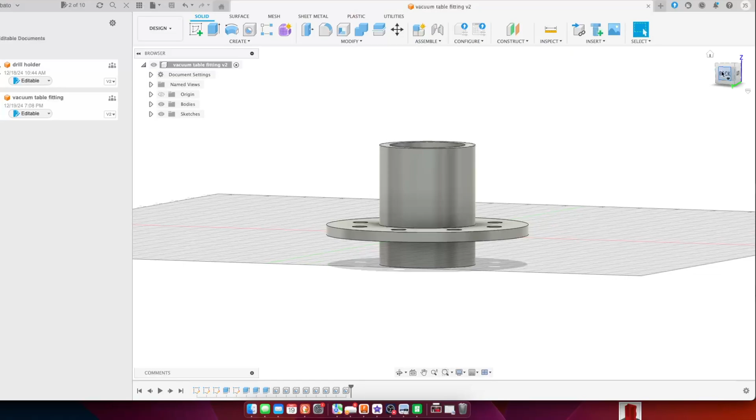Welcome to Outlaw Woodworking. Today we are going to design this little part for my vacuum table, and it basically goes upside down like that. And we need 8 of these.

We're going to turn our CNC table into a vacuum table. Right now it's a T-track, but I want to turn it into a vacuum.

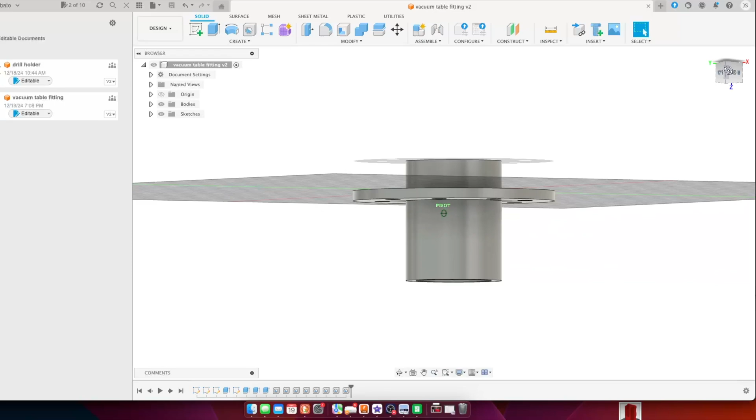So I need 8 of these parts. Let's get started. We'll draw this part and then we'll print it on our 3D printer and see how it turns out.

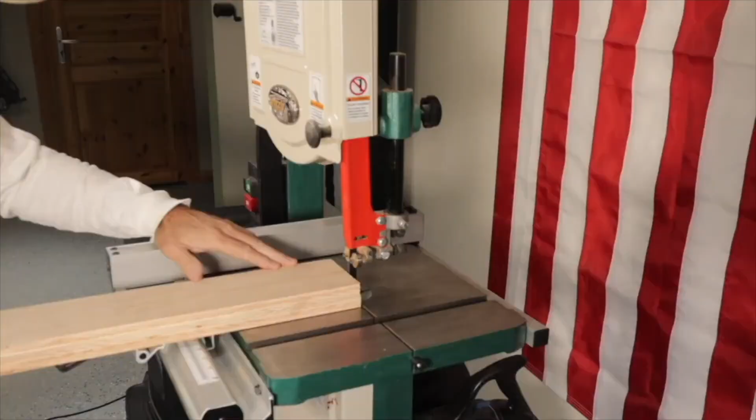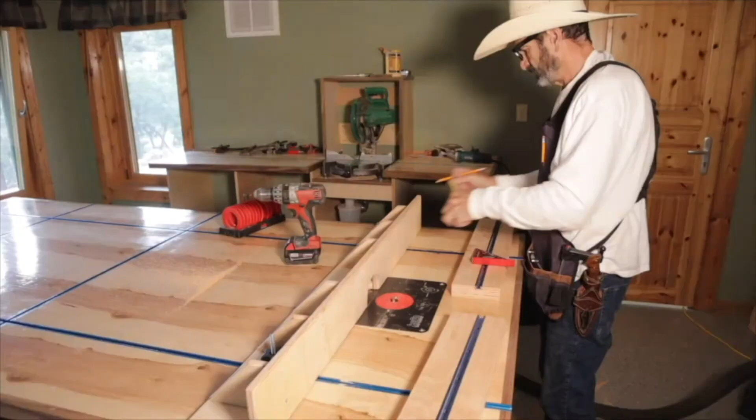There he goes, it's a working man. He's trying to make a living any way he can. And he'll break his back for $1 or $2. Oh, there ain't no shame in what he do.

Oh, work it out. So here we are in the new drawing, Fusion 360.

We're going to go ahead and get us to the top of this. This is where we're going to start drawing right here. We'll go over here to draw, create. Now the first thing we're going to create is the outside flange.

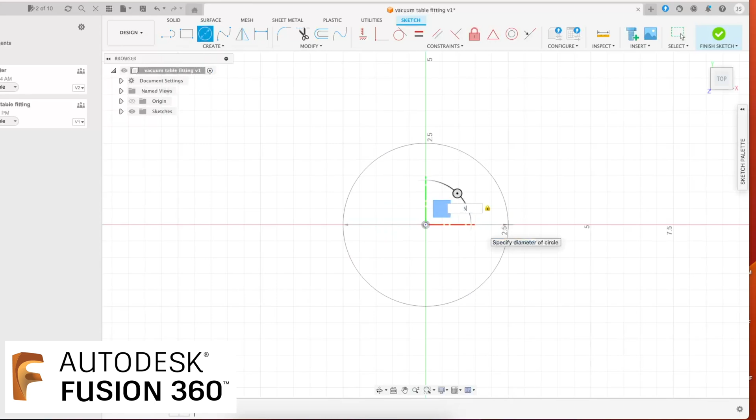So I'm going to go ahead and create a circle. And I believe that I'm going to make the flange 5 inches. So we'll go ahead and hit 5, hit enter, and there's our first flange.

Now I want the pipe to be able to travel. The pipe's going to go through this flange. So let's go ahead and create that circle next, starting with the outside diameter, which on a 2-inch pipe, the fitting diameter... let's see, is that right? The pipe diameter is 2.37. Let's check that real quick.

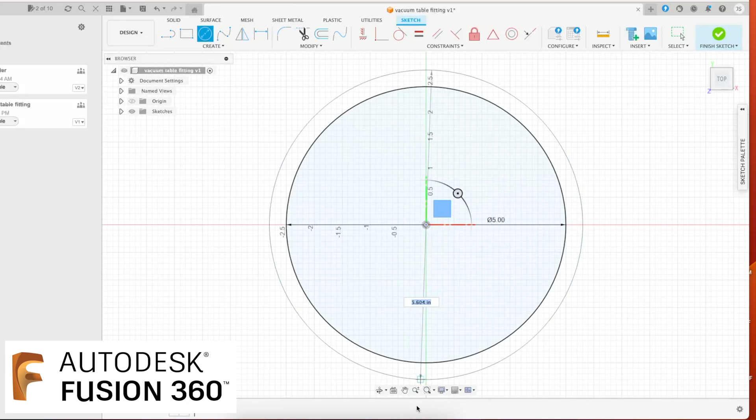I believe I have a file right here. Let's see. So right here, 2-inch pipe, outside diameter is 2.375. 2.375, okay.

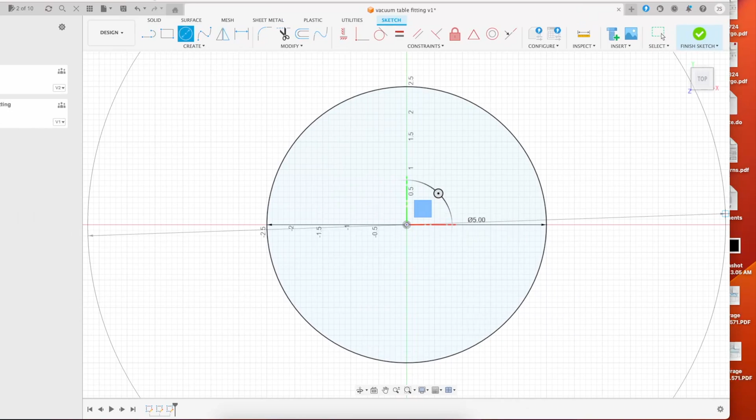So we'll go with that. We're going to go 2.375 and hit enter. Okay, so there's our outside diameter of the pipe.

Now we're going to put an inside diameter of 1/4 inch, 0.25. So we're going to subtract, we'll go ahead and just highlight that. We'll go up here to create offset, in the modify section right here, offset to the inside. So we should be able to go negative 0.25, and that creates that circle.

Okay, so now we got all our circles there. The next part of this puzzle, let's see, highlight. Okay, so it's got these highlighted just where we want.

The next part of the puzzle is actually the part I always struggle with, is all the little holes for the flange. So we're going to create a hole here. We're going to do 1/4 inch holes.

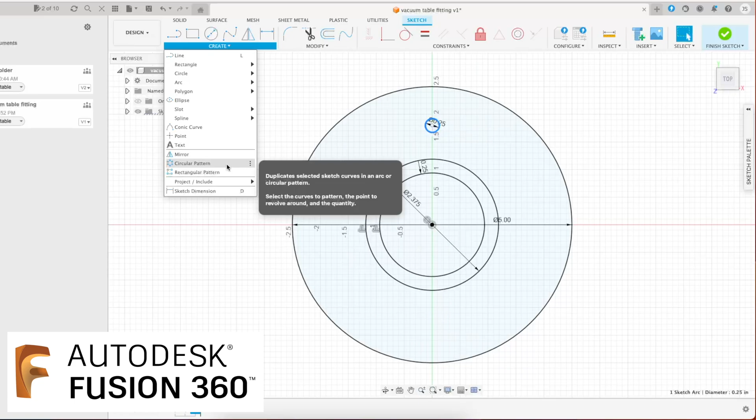0.25, hit enter, and now we're going to select this and we're going to try to do a circular pattern. Now we already got the one object. We go ahead and select the center point, and then we select how many screws we want, 8, and that should give us all our screw holes.

Okay, we're getting closer now. So what I want to do first is go for this one right here and put the thickness of this plate. I tend to go up here to solids, extrude, and I tend to be a 1/4 inch, seems to be pretty stout.

So we'll go ahead and create new body and hit OK. Now if you turn this, you'll see it's thicker. Got some nice sized screw holes there.

Okay, next up, we want to - where's our other ring at? We lost something here. Let's go back. So that should have just been that.

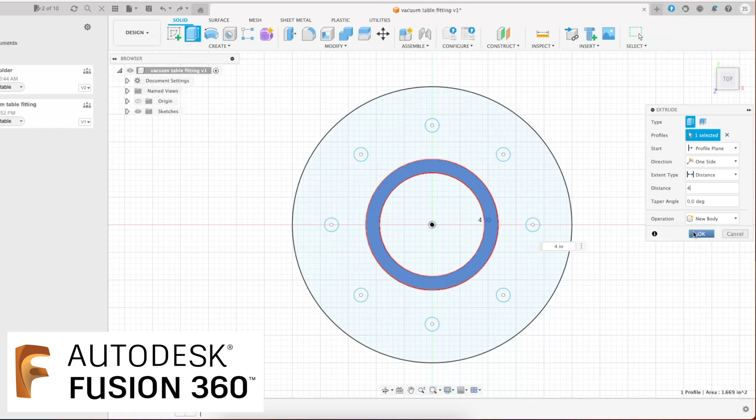Let's go ahead and extrude this one first and see what happens here. We're going to go 4 inches. Well, let's see, 3/4 inch. Yeah, let's go 4 inches and hit OK. Why am I losing this other thing?

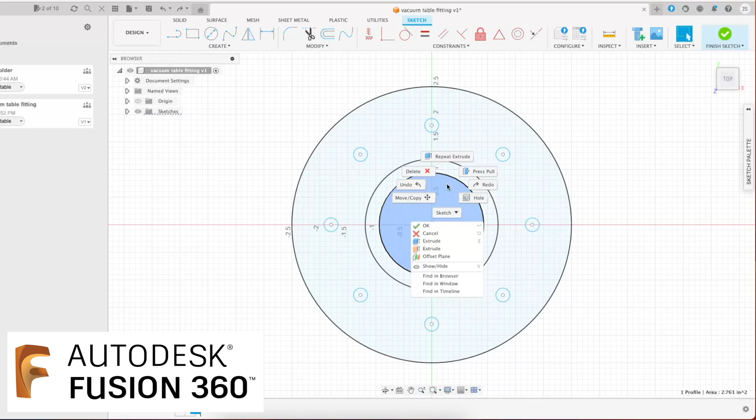It can be complicated sometimes. Okay, we might end up having to do this in separate pieces.

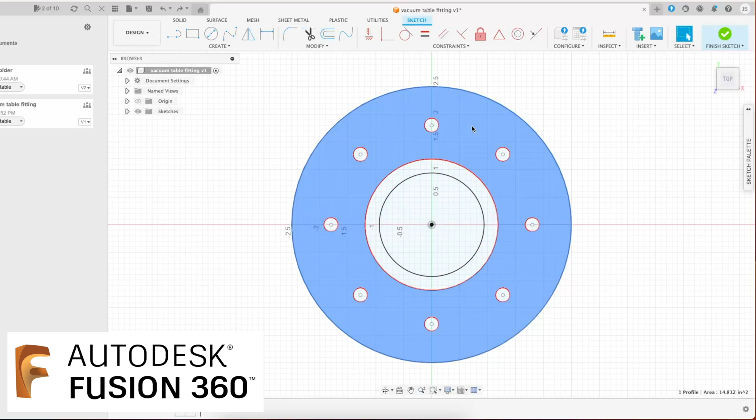All right, let's extrude this one first, 0.25. Profile plane, one-sided. We're just going to go one side, hit OK.

Now I don't know why we lose our pipe in the middle, but that's okay. Okay, let's go ahead, we'll draw another circle in here. I don't know why we got to do that, but that's just the way it is. We're going to draw another circle, and this one's going to be - oh, wait a minute, no. We need to offset this one inside.

Oh, I see, we lost that outer circle when we extruded this. So we'll go ahead and put a new circle.

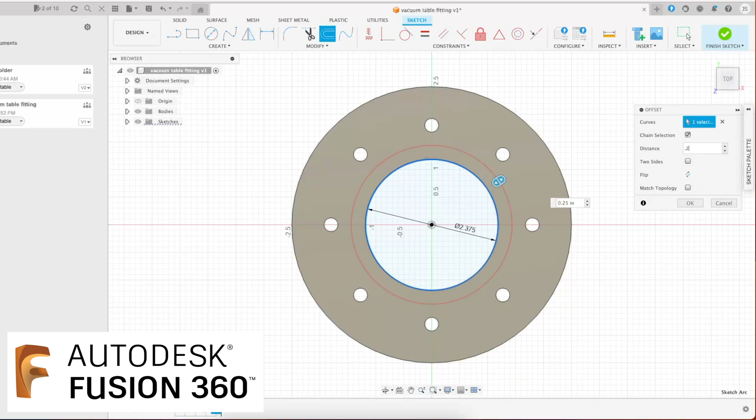This one's going to be 2.375, that's the shape of our part. And now we'll go ahead and offset that one. We'll select the curve. There we go. Now we can put 0.25, and we got to go negative to go to the inside, negative 0.25, and there we go.

Okay, now we're looking a little better. Now what we want to do is extrude this both ways. So let's see if that'll work. A lot of times you just got to try different things.

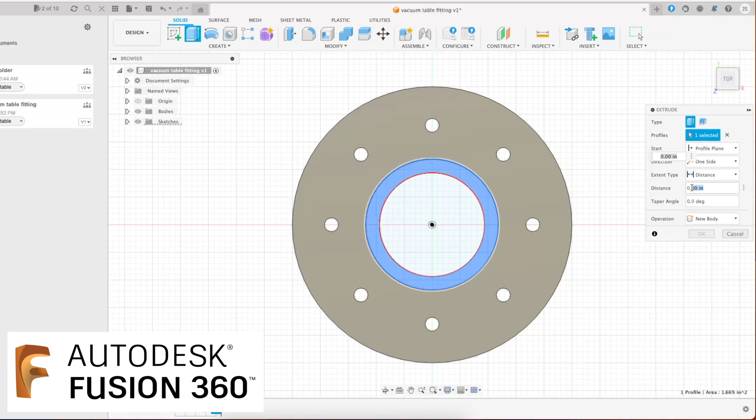I've got it selected, I know that I want to go 1 inch the other way, so let's go negative 1 inch. And that should have put us the other way, let's take a look at that. So that should end up at one, but I didn't want it to go that far, and it's going off of the face of it.

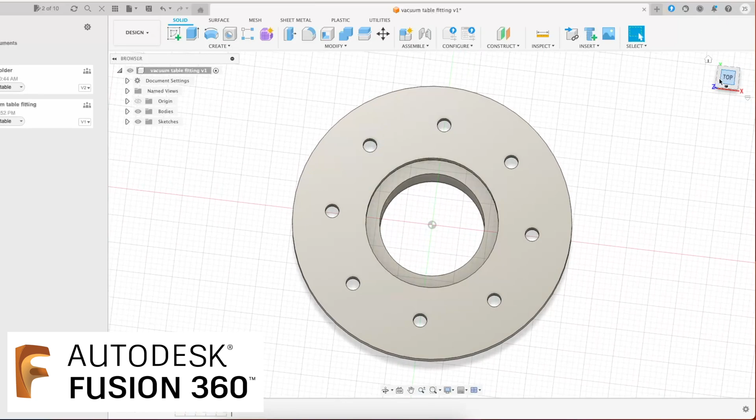So let's see if we can, actually what we can do is let's pull it back out. Let's see if we can extrude this twice. So this will be, we want to come the other way 2 inches plus a quarter, so 2.25. And we'll go ahead and hit OK, and we should be both ways now.

Yeah, okay, that's perfect, so this is the fitting that I'm looking for. The only problem is, yeah, that's looking really good actually. The problem I see is this is now 1 inch right here. Matter of fact, we're going to check it real quick.

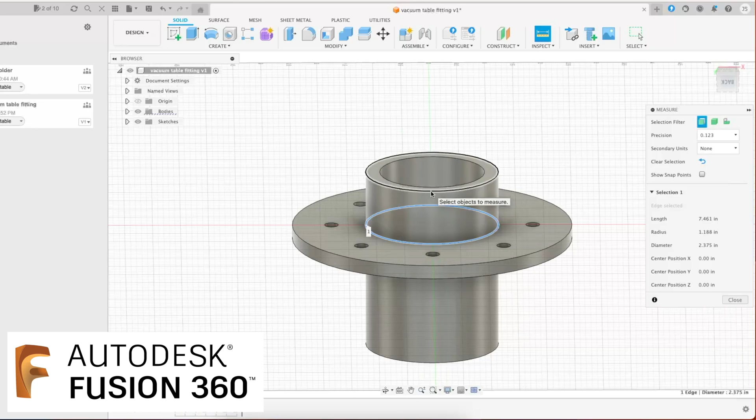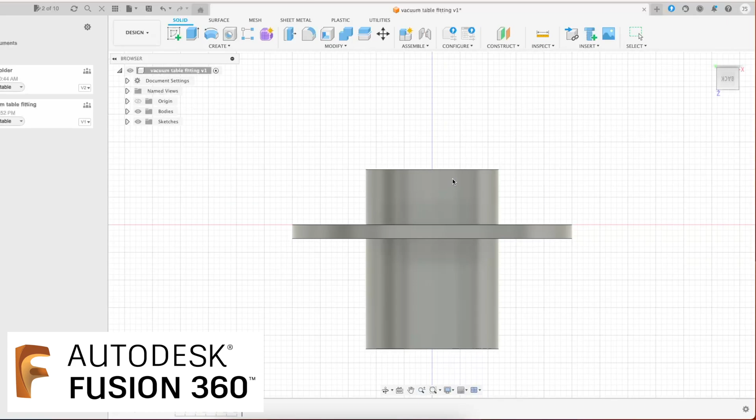The height, let's see, let's get a little better read on this thing. Close that. I want to measure from there to there. Okay, see, we're an inch right there. Now I want that to be 3/4, so we need, I think that's by itself, so no it isn't.

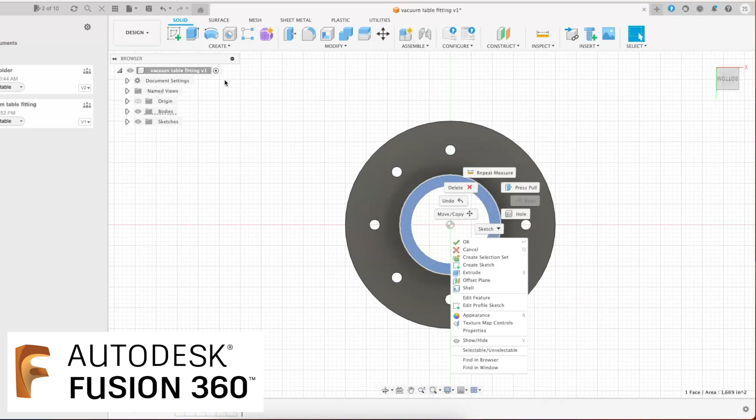Okay, let's go back here. Let's see which one I'm, okay, I need to be on this one, the bottom. So we're going to highlight this one, and we're going to change it and go negative 2.5, or we only want to be 3/4 of an inch, so we're going to go negative 0.25, and okay, see if that brought us down.

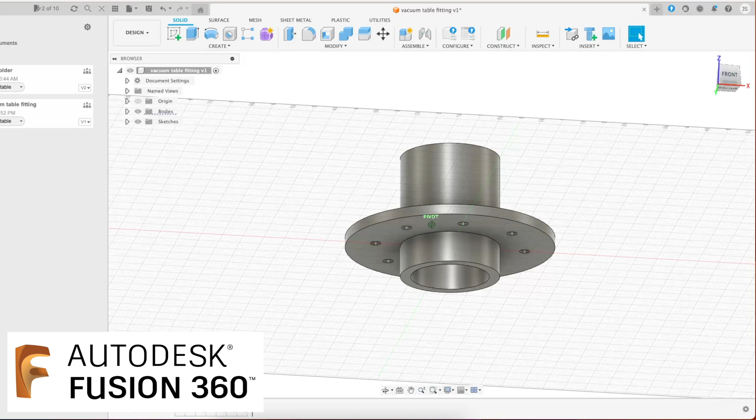Yeah, that's perfect, so you can see I reduced that top part right there, and that's looking good. So basically you can see that this flange is good. Picture the spoil board right up here, this flange is going to come into the bottom of it, and then the fittings are going to fit down here on this part and be able to connect them all. And I want to make 8 of these.

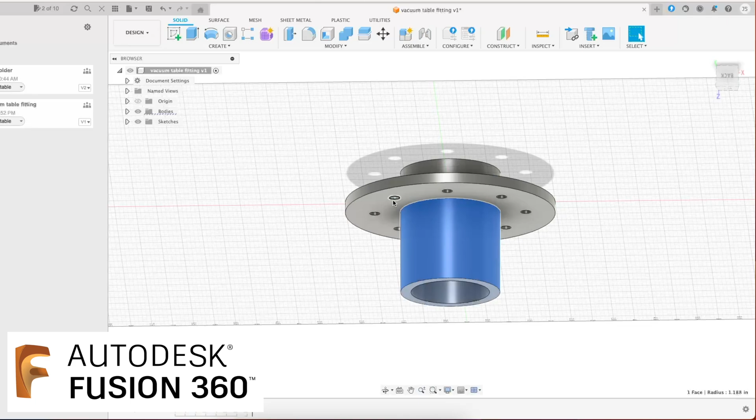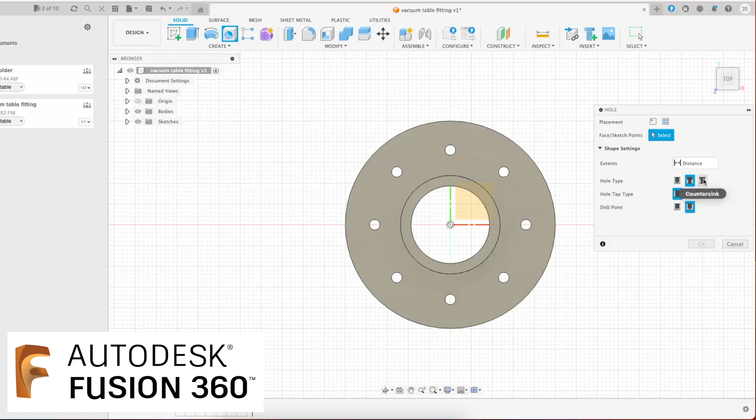Okay, so we need to fix these holes right here, we're almost done with this actually. We want to be on this side right here because that's where the screw holes are going to be. So what I want to do is highlight these holes, go up here to this hole command, and do just a tapered flush countersink. So you have to select the face, let's make sure our size is right. So we got 1/4 inch depth, 1 3/8 on the countersink.

Or no, 0.375, 3/8 is 0.375. And all the rest of that, this should be 1/4. All the rest of that looks good. So let's go ahead and select our first one. Hit OK.

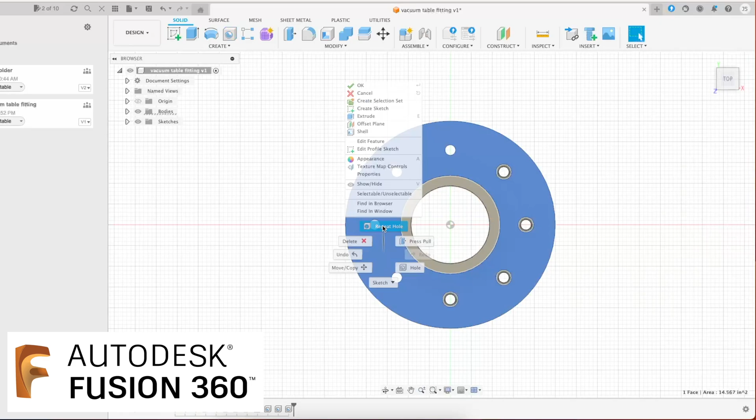And we're just going to repeat this all the way around. Hit OK. Okay, yeah, this each time it gets a little easier. You got to remember that the more you practice drawing and practice making fittings, the easier it'll get.

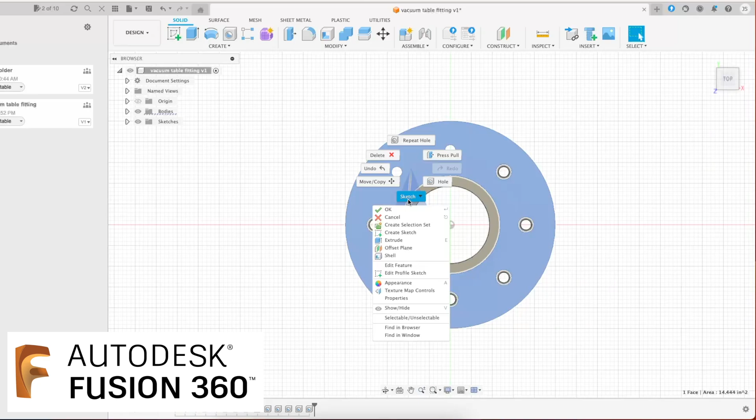I think holes are actually the biggest pain for me, I always forget how to, I don't know, I get a little confused. I wish you could just go and select. See if it's only letting me do one at a time, I'm not sure why. Okay. That's actually that's the whole drawing.

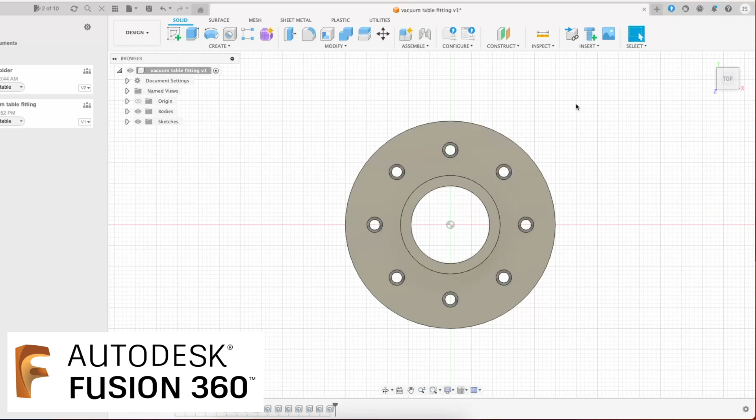And that is perfect, okay, let's go up here and save, make sure we don't lose this. Okay, now we're going to go ahead and export this. This is going to take some STL files to the desktop, export. So the one thing about this, so now we need to jump over to

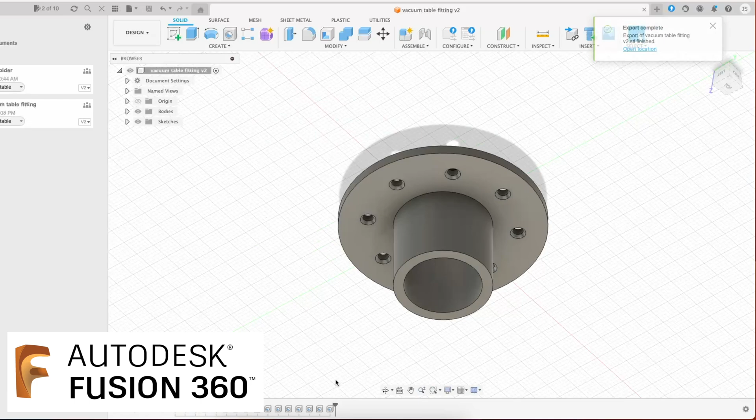Bambu Studio, there's the part I'm looking for. Okay, now let's take a look at this, make sure this is the part. That's the part.

It's pretty fun making your own parts. Now this one's going to take a bit, so let me go up here and check all this stuff. Bambu Lab X1 Carbon, that's correct, textured PEI plate, that's what I have, and we're going to use Bambu PLA-CF, that's the carbon fiber one. It kind of makes a nice little texture. I wouldn't say it's necessarily stronger, but it does make a nice texture. So let's go ahead and preview this.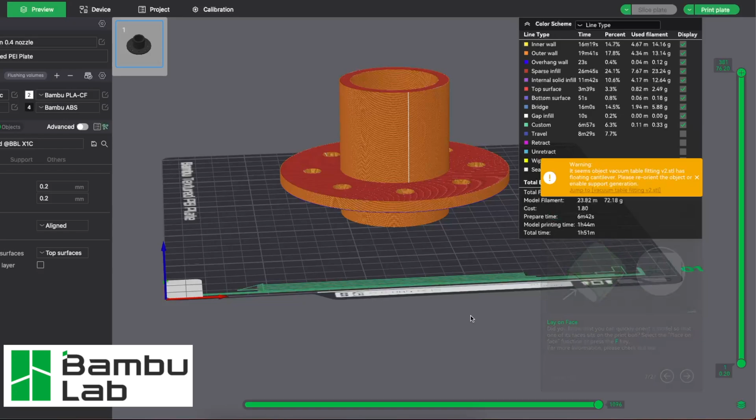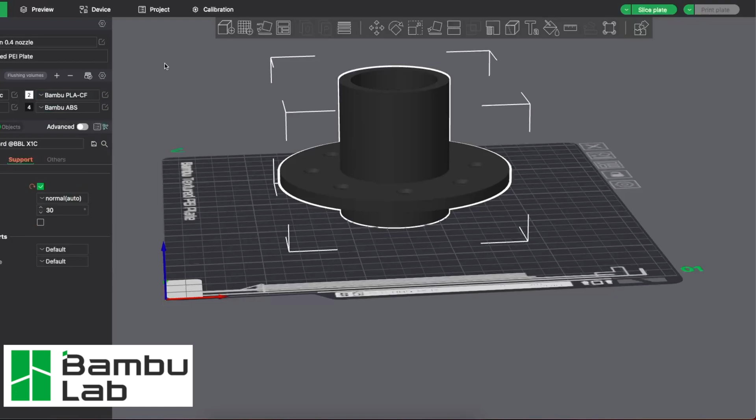It says the object vacuum table fitting has a floating cantilever. Please reorient the object or enable support generation. So it sliced it before I had the support ready. If you go down here, go to prepare, then support, and enable support right there. Now it's giving me another warning, let's click out of those. Enable support, normal auto. I've got the PLA CF texture plate selected, that all looks pretty good.

Let's preview, and you can see it put all this support underneath there. It's not giving me anything bad right now. Let's go ahead and spin it around, you can see all that support. What a waste of material, but you kind of have to do it on this type of part. Okay, I don't see anything else wrong with this.

Line type, device, so we're going to go ahead and pick the PLA, and load that. Confirm. So right now it's loading the black filament, and actually I don't know if I have enough. Let's see, might be enough, might not, I'm not sure. Okay, let's go back to the preview.

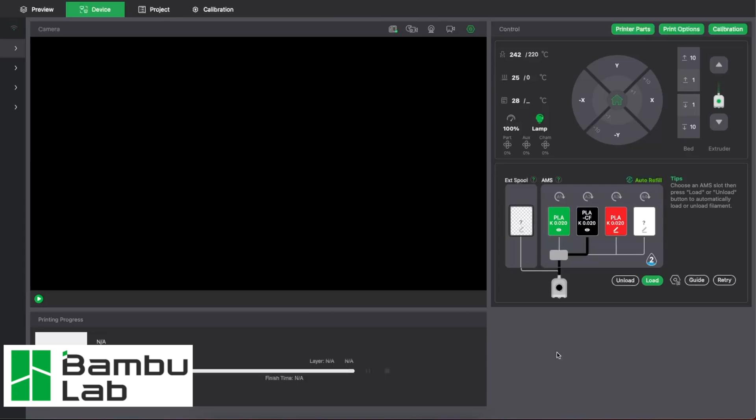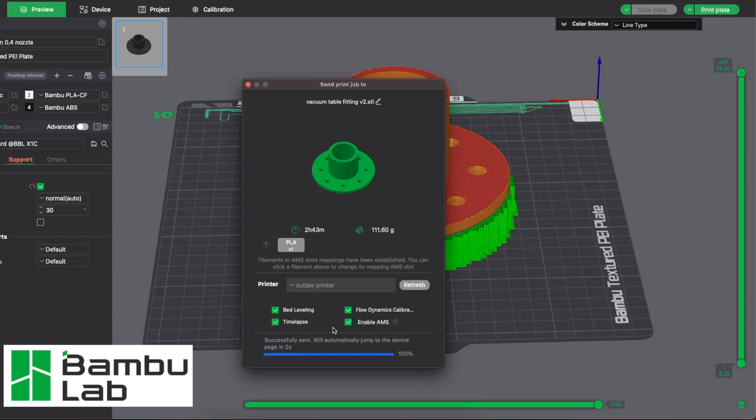Okay, we should be able to send the job to the printer now. It's going to go in there, level the bed automatically. You can see I've got it checked to do a time lapse, it's going to do the whole thing. It just said it's successfully sent, the vacuum table fitting, and hopefully it'll turn out.

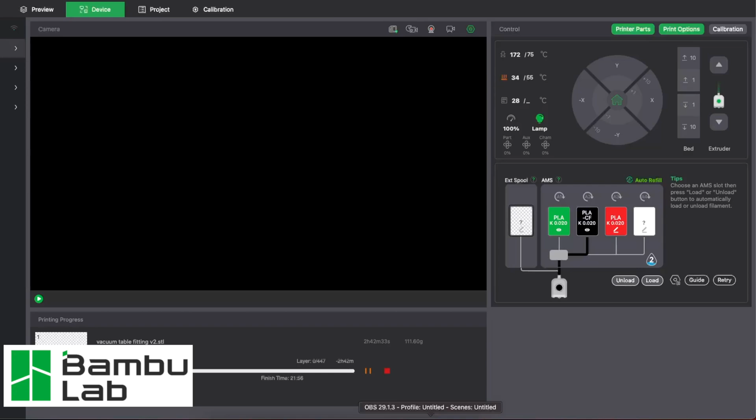I'm a little worried that I don't have enough of this PLA CF, I'm not positive how much is on that roll. It's not a huge fitting, but there is a lot of waste as far as the support system that has to support that cantilever, it's like a 3/4 inch support system. So yeah, we'll give it a try, let's go to the printer and see how it turns out. If I run out of material, I'll just have to remake it tomorrow.

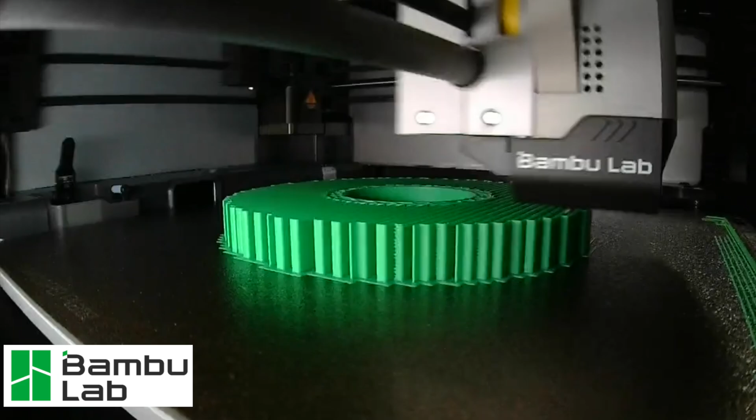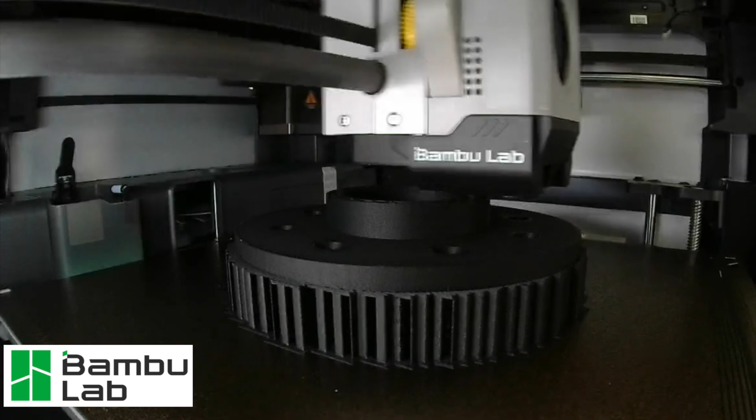Now you're always learning. This was originally supposed to be PLA CF carbon fiber, and I noticed I accidentally sent it to the machine with PLA basic green, and here it is, time lapse. It finishes, took about 2.5 hours I believe. After realizing what I did wrong, I went ahead and printed one in PLA CF. I don't believe there's any difference in strength in these materials, but the carbon fiber version has a little texture to it. I'll show you a picture of it all done right here.

So here you can see the carbon fiber one, and here's the PLA basic one. They both came out really good. I did learn a few things doing these. The bottom takes a lot of support for both of these, but they took equal time. Both filaments worked good, I didn't have any problem with the carbon fiber. I did learn that there's no carbon fiber strength in it really, it's just basically a different type of texture. But these are going to work really well.

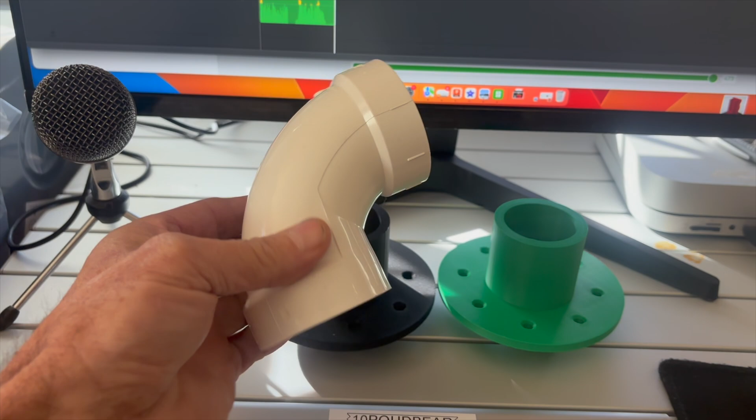I'm going to be using 2-inch PVC fittings to connect the whole vacuum board together, and they fit really good onto this. I don't know what type of glue I'm going to use for this, but they're a nice fit and should work really well. This will basically go up, and I've got to make 6 more of these.